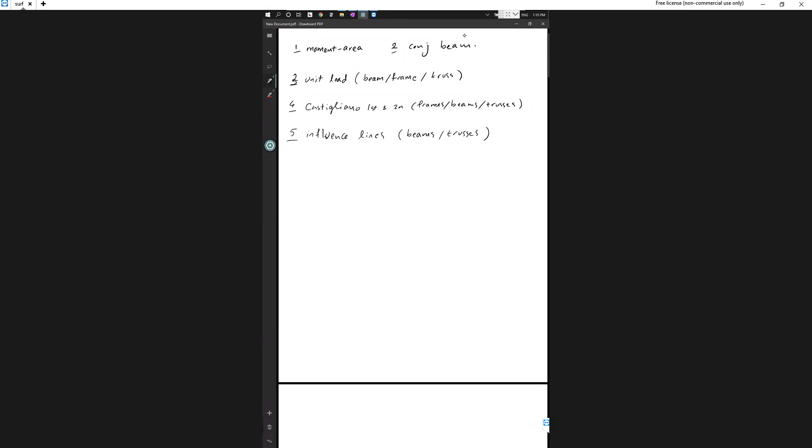So let's begin with influence lines, right? This is probably definitely gonna be there several times, maybe. So let's see, this is I think similar to what was done in class lecture.

Right, so you have a beam like this. As I'm moving forward, if you see something you don't understand, you can either unmute yourself and talk or write it in the chat area. All right, so that's the problem. Let me see.

Yes, okay, so let's call this point 1. Let's call 2, 3. Let's call this 4. And let's call this 5, right? So you have all these points, right? So this is A, B, C, D. So this is your beam. So you can plot the influence line.

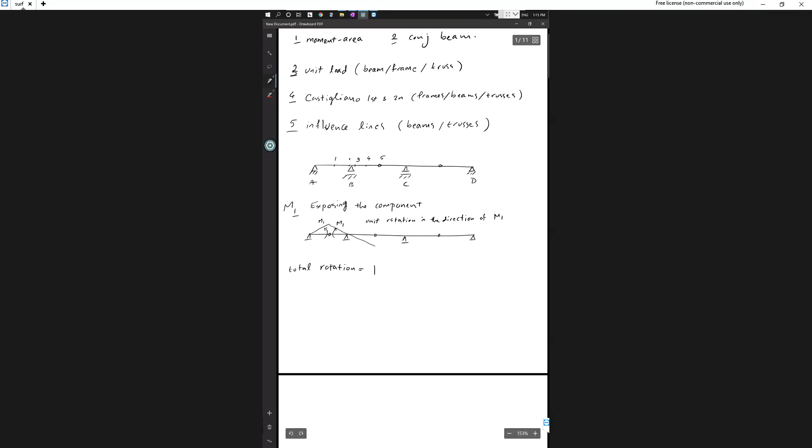So I can move this, bring this up, right? Nothing is preventing me from doing this. So when you come here, for the right side, you can bring this down. I mean, for these problems, you can start plotting and going forward until you run into an issue, right?

So as long as there's nothing wrong while you're moving forward, you can keep going. So there are a few criteria you have to keep in mind. For example, you have to pass through the supports, right? So you can't detach from the supports. The other thing is that this angle should be 1, right? So here is a pin support, right? So you can only break the beam at pin supports, right? So I have to pass through this point, and also you have to pass through this point.

All right, so I have a question: why did I put a hinge between A and B, right? So as I was saying, the first step of our influence line plotting is that we have to expose the component for which we want the influence line, right? So if I want the influence line for moment at 1, I have to somehow bring out the moment at 1, right?

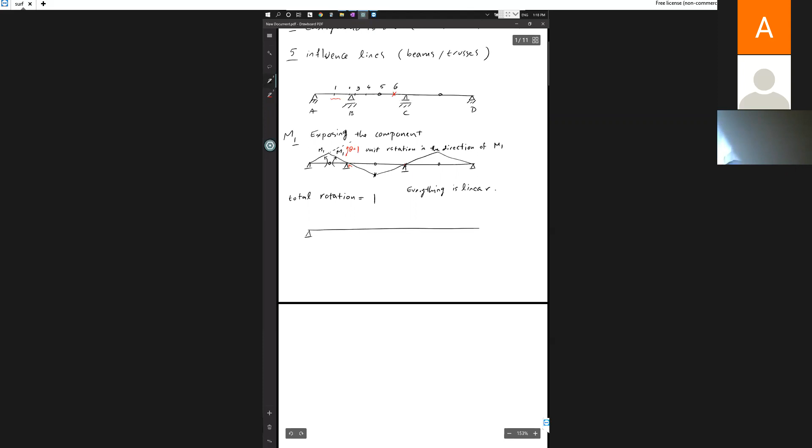Okay, so let's call this point 6, right? So let's draw the influence line for point 6, let's say M6, right? So you put everything as it is. You have this pin here. So what you have to do again - the first step is exposing the moment, right?

So you put a pin. This is basically the same thing as the original beam, but you've just brought the moment out in the open explicitly to be able to rotate the members, right? Okay, so if I want to rotate, what do I do?

So I rotate the right side first. Let's see what happens. So I know that I have to pass through this point, right? So I come down here. And I know that I can break at this pin, and I know that I have to pass through this point. So there is just one way to go, and there is nothing wrong with this, right?

All right, so what about the left side? Let's try something - I'm not even sure what the left side looks like. So I try stuff, let's just keep it straight. So I see that if I want to keep it straight, I have to draw something like this, right? But this is not possible, because this member has to remain straight. Because you have to pass through this point, you have to pass through this point, and there is only one way to do it, by remaining straight.

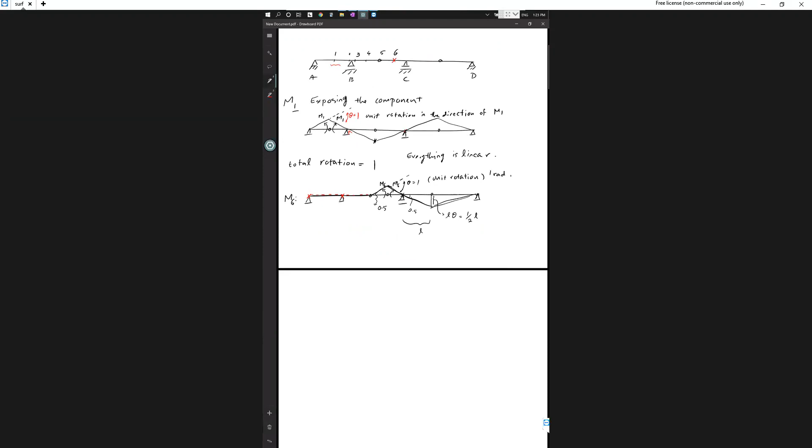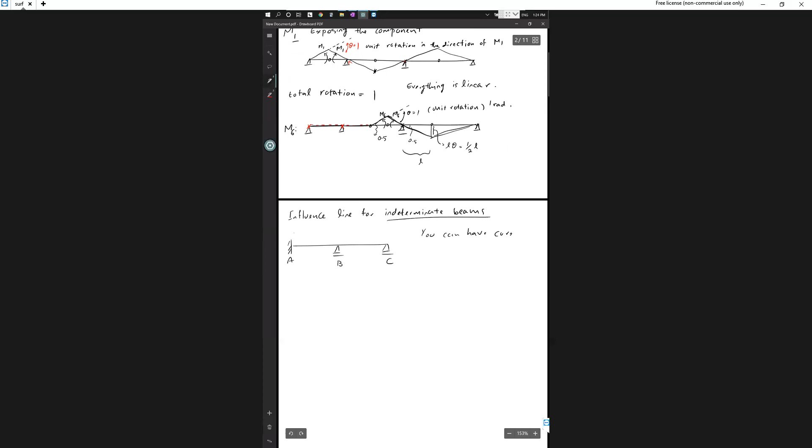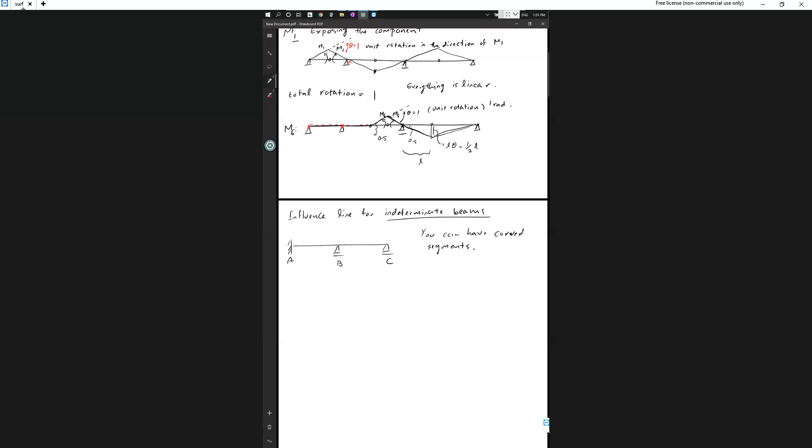Now we go to influence line for indeterminate beams, which is what you're mentioning. So you have the homework problem, which is like this. Let's call this A, B, C. For indeterminate beams, unlike determinate beams where everything had to stay straight, you can have curved segments.

So if I want MA, exposing the force is basically the same again. If I want to expose the moment at A, I can put a pin there. So in your head, you imagine that I'm first zeroing the moment there and then putting its actual value. So there's a moment here, and I have basically exposed the force.

For these indeterminate ones, this is just qualitative. All we can do is plot a qualitative graph. You can't put actual values on there anymore. If you wanted actual values, you'd have to solve an indeterminate problem. But the procedure is the same, except now you can curve the members.

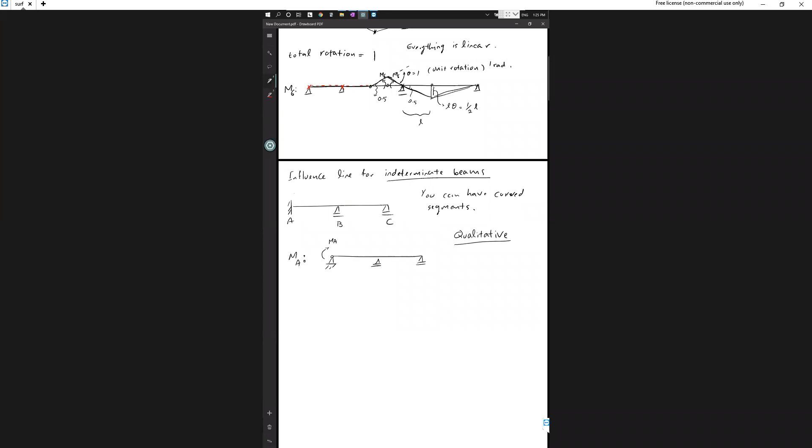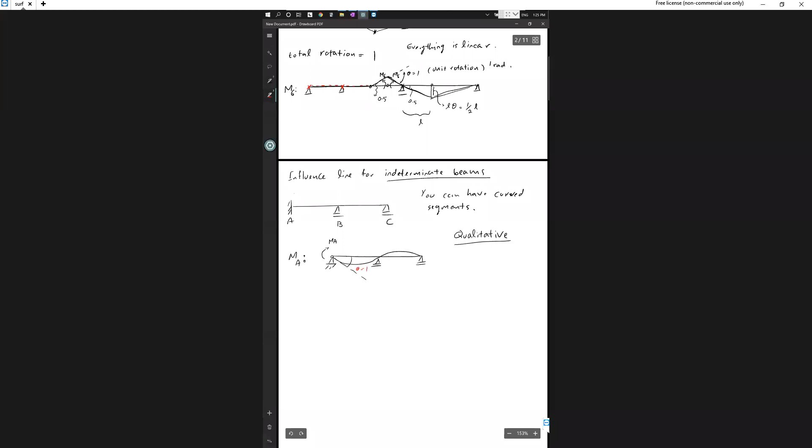If I rotate, again you have to have a unit rotation because it's a moment. So if I do this, you see it gives you a qualitative sense of how things look. This has theta equals 1. So let's do RA.

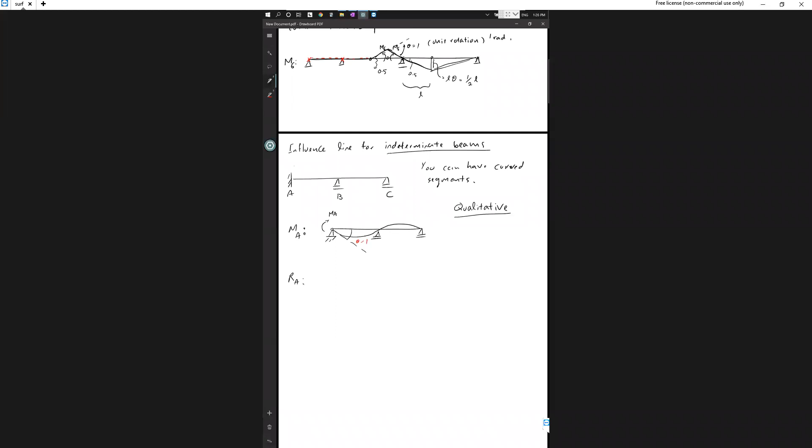After this one, I'll also do an influence line for truss. So let's say RA. Again, expose the force: first zero it, then put the load on it. If I move this up by a unit value, I get something like this.

So let's do one more, just if I put E here. Let's say M at E.

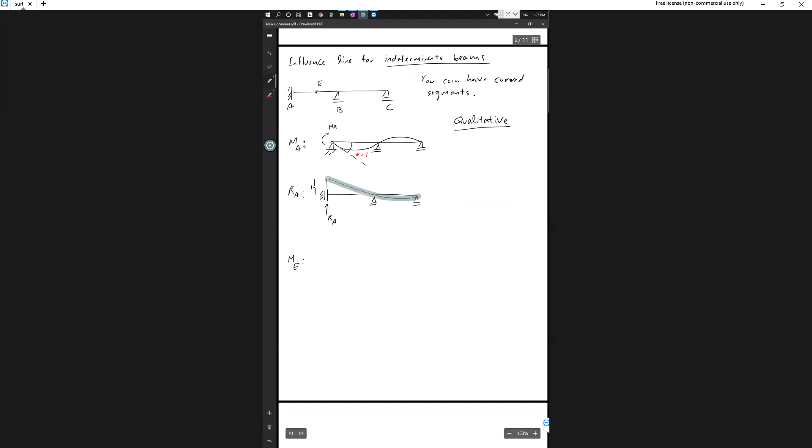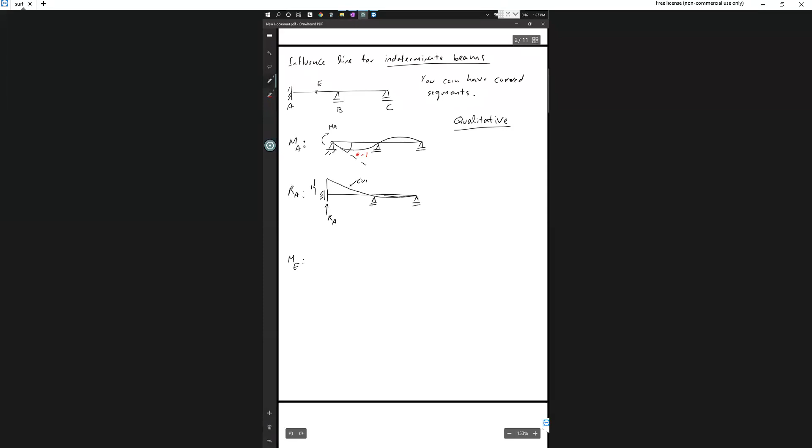For point A to B, is that a straight line for reaction A, or is it curved? It's curved, right? I didn't like, you can imagine it's curved. Yes, this is also a curve. Okay, thank you. Yeah, sure. Nice, thanks for talking, I like that.

So let's do ME and then we move to a truss. Again, exposing the force, it's the same. So you have a point E. If I want to expose it, I just put a pin. I put ME.

So how do we do this? You have to have a unit rotation in the direction of ME. Again, the principles are the same. If I want to move this in this direction, the left side is basically a cantilever, and the right side is again like a curve like this.

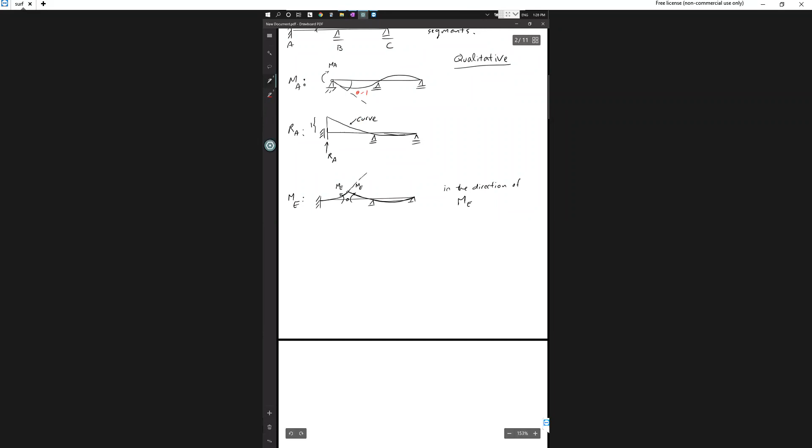Basically, you can imagine that you're putting a moment here and trying to deform the beam using that moment, or you're trying to have a unit difference in rotation. But how you achieve this difference in rotation is by putting a moment there. So this difference is again the unit value.

Any questions on influence line for beams, indeterminate, determinate, and stuff like that? I have a question.

In the homework, there's a unit load going down for the first question, how does that affect this? Oh, that unit load is just to guide you, to remind you of the definition of influence line. So it doesn't affect it in any way? No, the procedure you use to plot it is just like this. Okay, thank you.

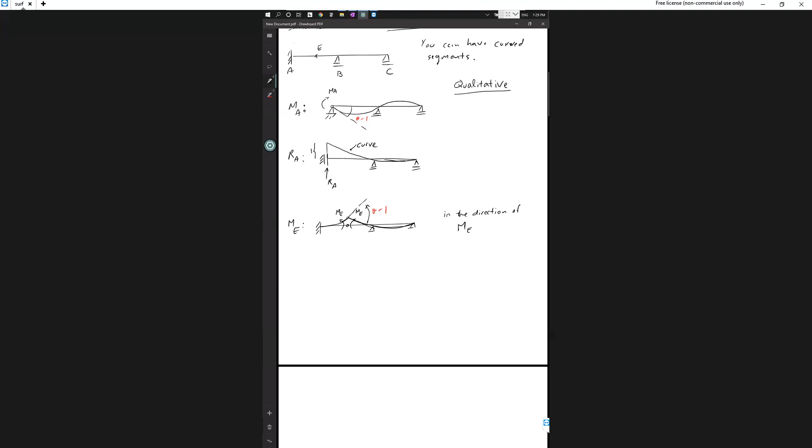Other questions? All right, so let's look at the influence line for truss.

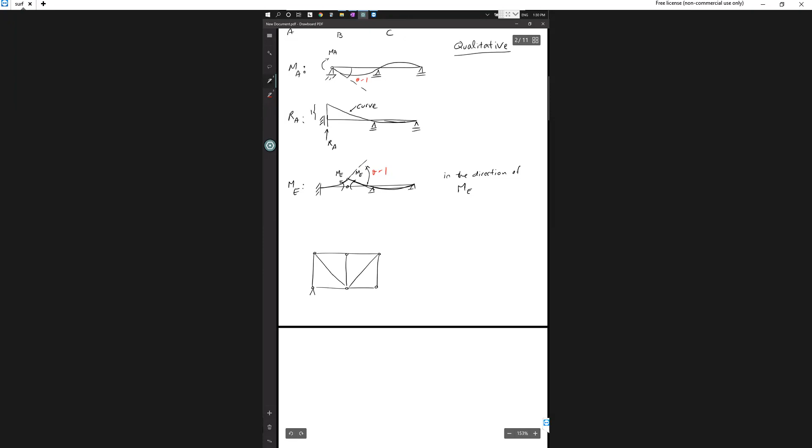I'm just going to use a very simple one. Let's call this A, B, C, D, E, F. For influence line in trusses, the truss one in homework is basically the same principle here, that one is just longer. So if I show how we do this one, it's easy to generalize to that one.

Or I can even do the one in the homework, there's no problem there, let me just bring it up. Where is my... let me find it. All right, no, this is not the one. This is the one. This is the truss from the homework problem. Let me see if I can just quickly do it to save some time.

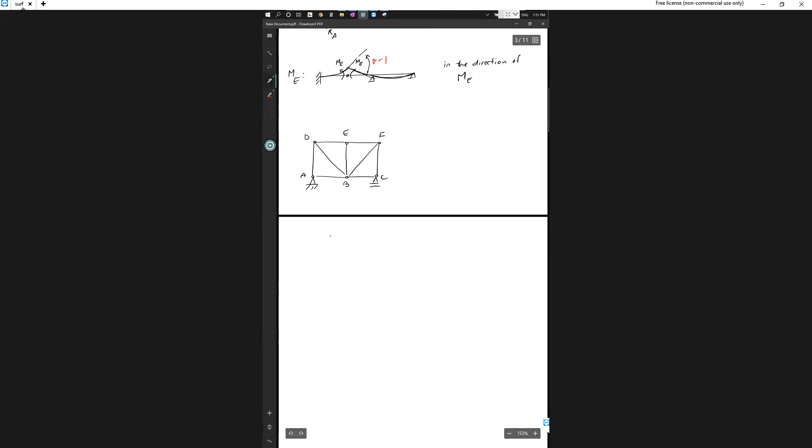Okay, it's not pasting for me. Okay, you know what? I'm gonna do it.

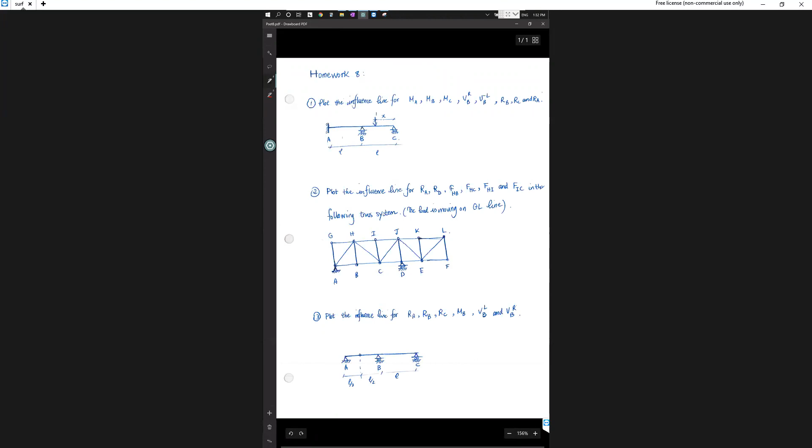All right, so let's say I want the influence line for this one, right? This is the truss. So we have to basically go back, new page.

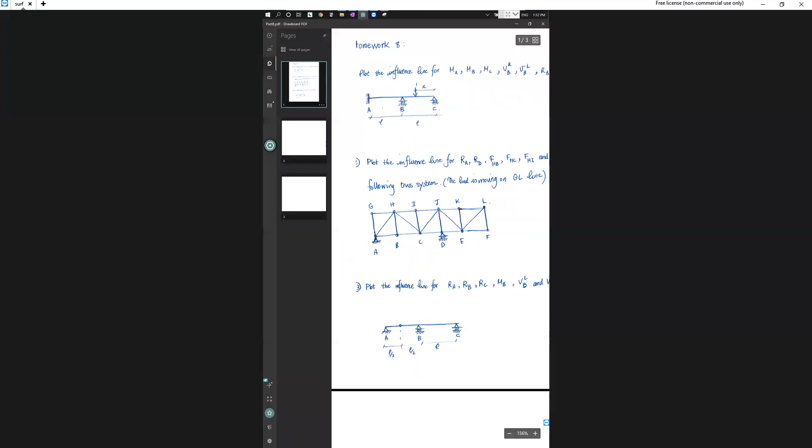So we have to go back to the definition of influence lines. For trusses, this Muller-Breslau thing that we did, like unit load, unit displacement, rotation, right? This is not applicable to trusses. For trusses, you have to just use the definition.

For trusses, the question has to tell you the manner of application of this unit load, right? So the question could be asking for unit load for the moving load along the bottom segment, or maybe it could be asking you for the top segment. Here it's asking for the load moving on GL line, which is this top segment.

So this is not the one. So basically you have a moving load on the top segment, and for these trusses, you apply the load only at the nodes, right? Okay, so let's see.

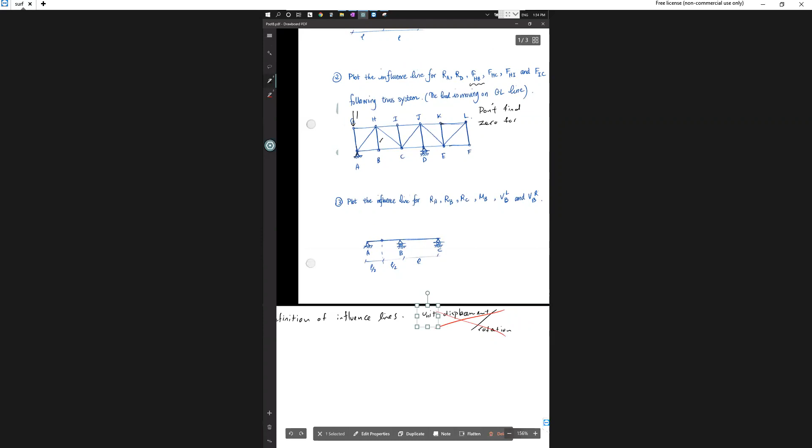Don't do the zero force member before putting the load. This is important. Don't find zero force before putting the load.

So after I've put this unit load here, I can start solving the problem. Like if I want FHB, this is 0, and you're done, because you just want the force in this member. Because you're plotting the influence line for this member, it means that you put the unit load at different places, and each time you find the force in this member. So you don't need to go about solving all the problem. So that's step one, you're done.

So you remove this, you basically reset the problem. You start from the beginning again. Now this time you put the unit load here. You see, this is again zero force member. Then when you want to plot it, you plot this.

So the x-axis is the position of unit load. I saw that when my unit load is here, the value is 0. When my unit load is here, the value is 0. When my unit load is here, the value is what? This is a zero force member again, so it's 0.

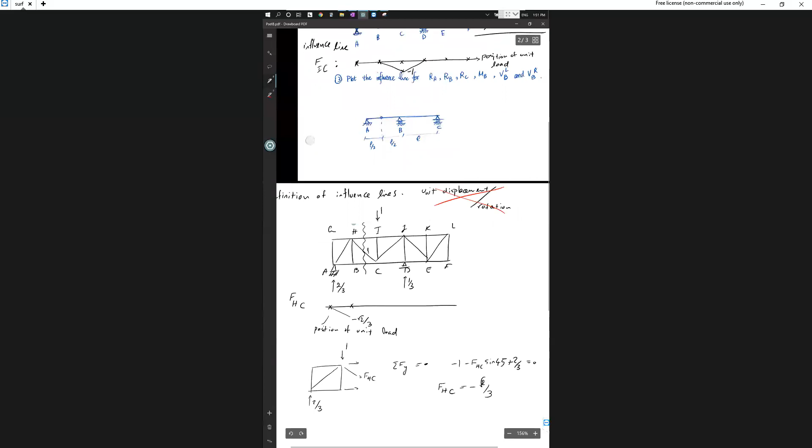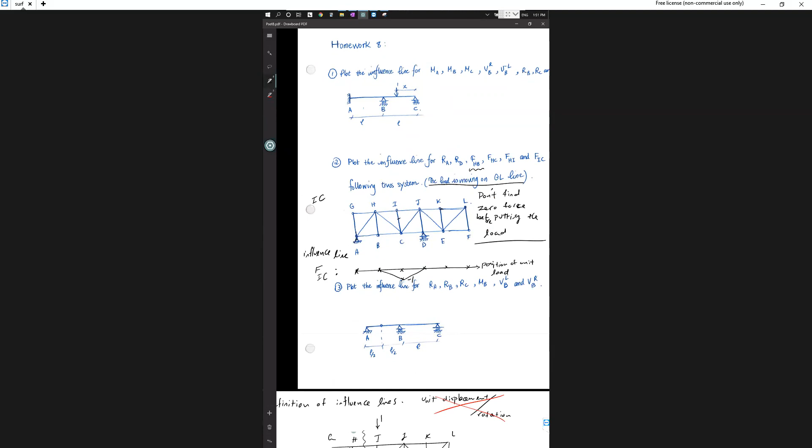Well, all right, any suggestions what we should do now? Problems? I mean, it's online, so I can continue, right? Technically we're at the end of class, but the good thing is no one's gonna throw us out of this class, right? So I'll be continuing until the next people join.

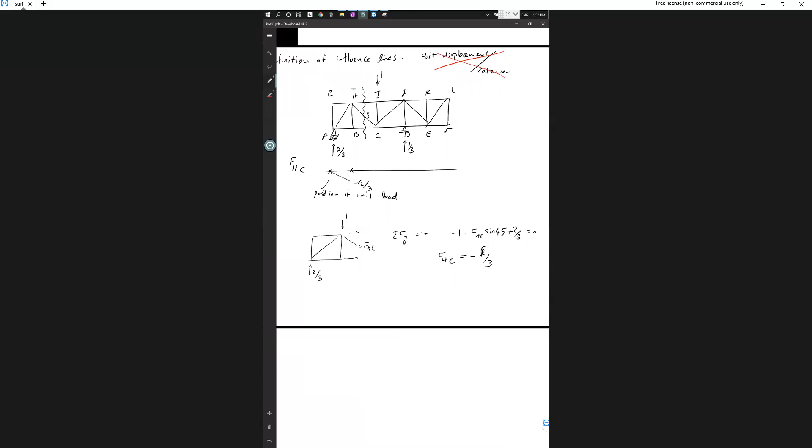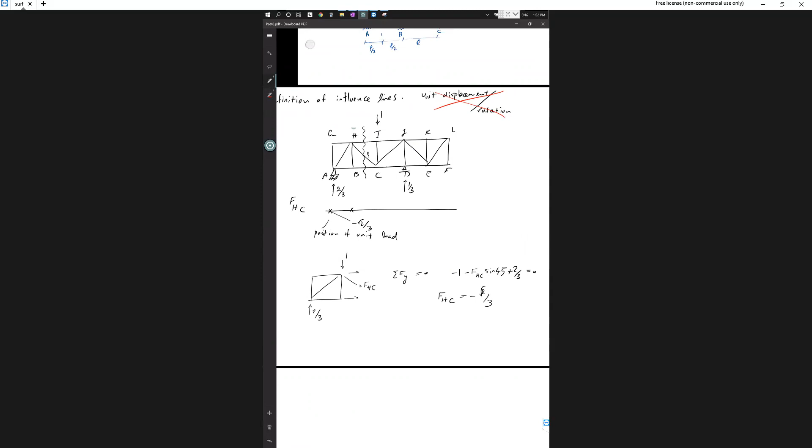So Ron is asking, does the influence line for HC start at point G or H? So you mean like where does this line start? Like this line?

Basically what you do is find the forces at these discrete points. So you have a bunch of points, right? For example, you find that at this point it's here, and then you connect them with straight lines. So you have found that at this point it's 0, so you already have a point here. You have found that at point H, when unit load is at H, it's at this point, right? So you connect them after that. Does that answer your question?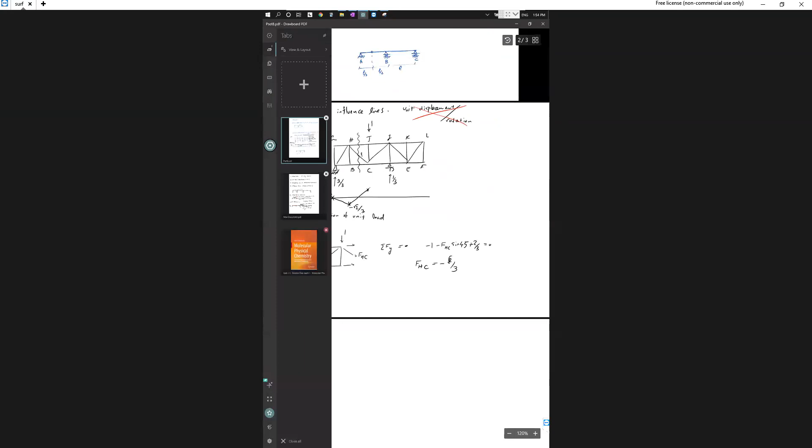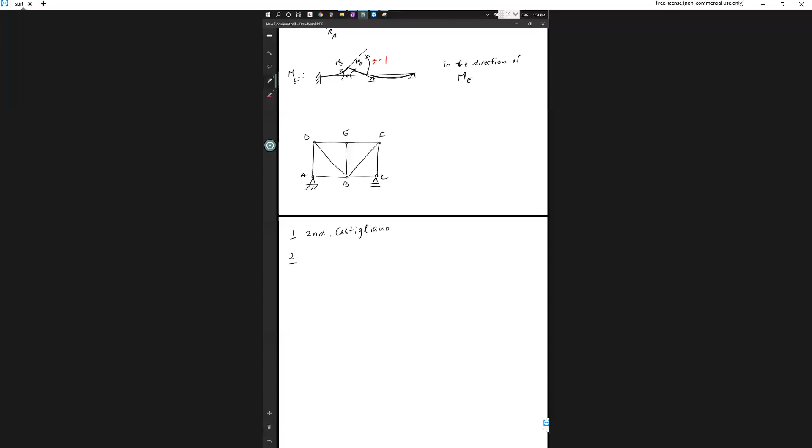Let me see, okay we're back here. Good. So we have 2 requests: second Castigliano and unit load for frames. Unit load and second Castigliano. Let me see which homework was on second Castigliano, I think it was homework 7, right?

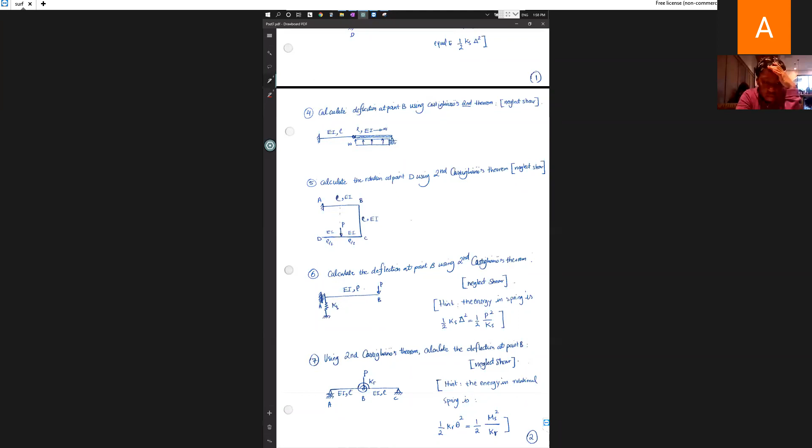All right, I'm back. Let's see. What's a Discord party? All right, let's see what's happening. Choices. Oh, okay. Discord party.

Right, yeah, reacting to messages would be a nice idea.

All right, so let's see what other people have joined for the second class. I'm gonna make this a continuation of the topics we covered in the first part. I've recorded this, so I'll upload the link and you can see the video of the material we went through. I just did some influence lines for the first part. So now we're gonna focus more on deformation stuff, and I'm seeing that people are requesting that, so that's good.

Okay, so let's see what topics we want to cover now. Second Castigliano, I'm gonna do this for a frame first. The unit load for frames. And then for unit load for frame, maybe we can do the midterm, the quiz 3 one. Right, I'll do this one. And first Castigliano, I'm gonna do the quiz 3 one.

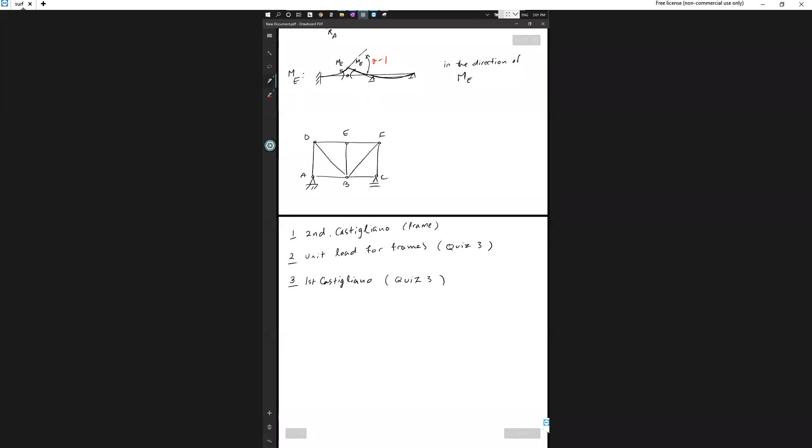So second Castigliano, all right, let's start with the second Castigliano one. Let's find a good problem, like what should we solve? Let's do one of these spring ones. I think I never did this one in class. Yeah, this looks good. Do you guys like this one?

So yeah, I want to do one second Castigliano. I've seen in your exams and quizzes that some people are a bit confused about which method is what. So before jumping into more complicated homeworks, try to use just the simplest examples you can, just to make sure you understand the methods themselves. So always start with very simple, simplest possible examples. Just draw yourself a cantilever and try to solve it with all these methods and check if you get the same answer or not. That's always the best strategy, to start with the simplest stuff.

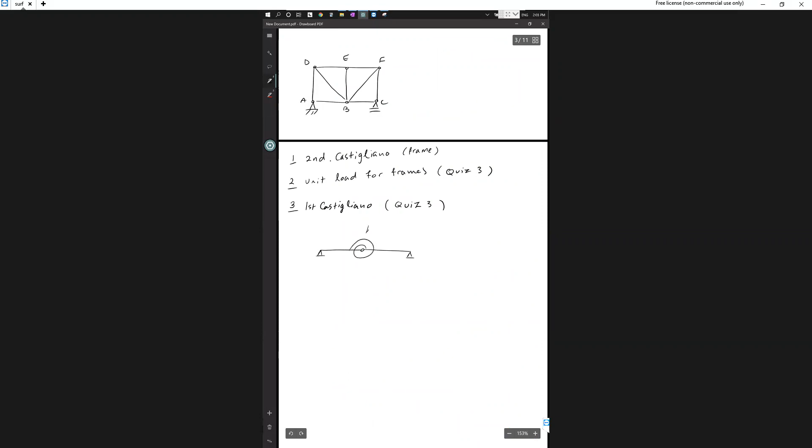So yeah, let's do this one. What do we want? Deflection at B using the second Castigliano's theorem. Okay, let's do this. So we have this thing, right? This is Ks. There's a load P here, right? Here's a load P. All right. So this is L and EI, this is L and EI, right? Okay, let's do it. So we want to use second Castigliano. Just for yourself, write this thing down. So see, this is the first.

So this is first, this is second. The first one says that u should be a function of delta 1, delta 2, or even delta n, or rotation 1, rotation 2. This second one is a function of externally applied forces, so it's about writing the energy as a function of forces.

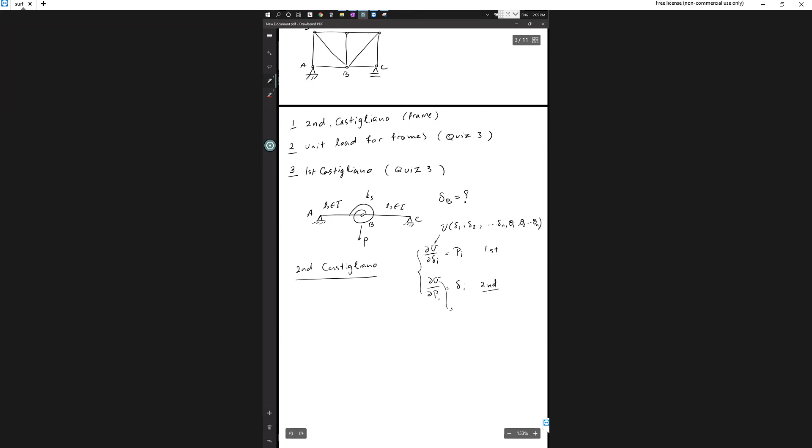Someone's asking what are we solving for. So A, B, and C, we want delta B, using second Castigliano. The second one is a function of externally applied loads, right?

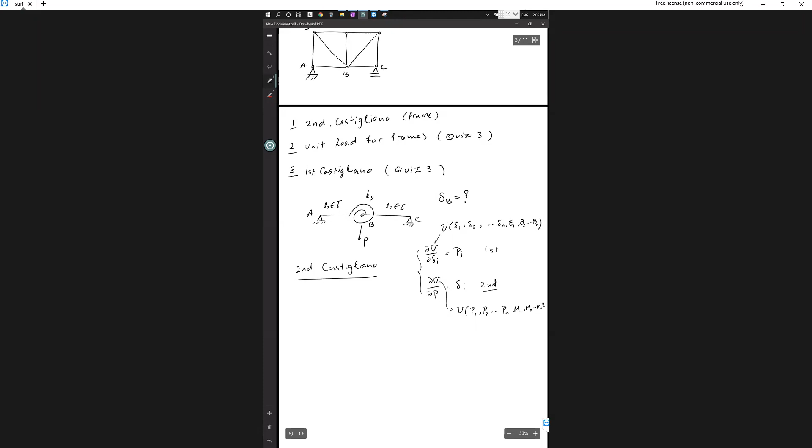Like you can have M1, M2, and Mn. Distinguish the first one from the second one clearly, and make sure you understand these two methods are different. When you solve something using the first one, you use formulas like EA delta squared over L, 2L. This was for a bar, remember? For the beam segments or frame segments, you had that big formula. These are functions of deltas.

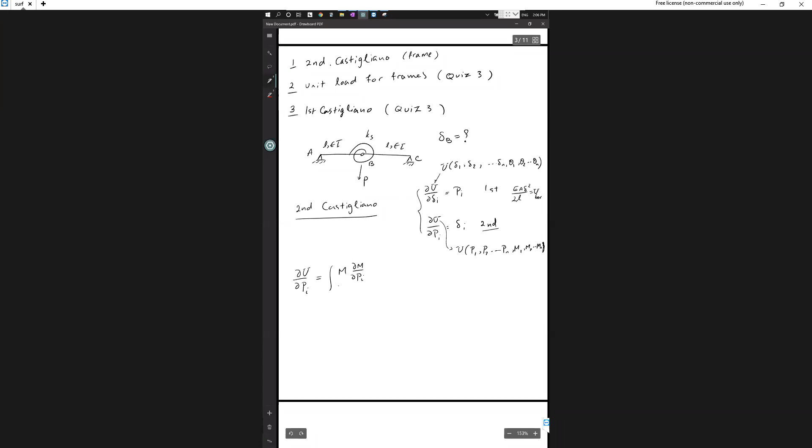But for the second one, how you calculate energy is different. You say, okay, I want this partial thing. This partial thing would be the integral of m, partial m over EI. This is when you want to include just contributions from moment. If you want contributions from axial force, you have to include that as well.

Remember that this is after the equation, after differentiation. So u itself is just the regular m squared over 2EI plus n squared over 2EA.

All right, let's see. Again, I'm stressing that this is the second Castigliano. The second one is about forces, and basically you just have to find the moments and axial forces in the segments, and write energy as a function of forces. So I just have to find the moments. This one is a very simple one.

So if I do this, there's a P here, so this will be P over 2, this will be P over 2. If I take my x from here, and this is symmetric, I just need one side. So m of x is Px over 2.

What was the first one? The first one was unit load method, right? Unit load method.

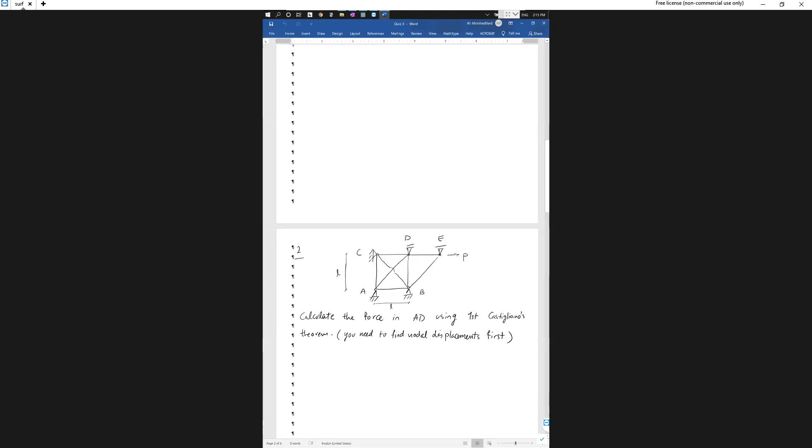I'm gonna start with... what do you guys think? I think I never solved this quiz problem in the homework. Do you want to solve all of them? I can start from the beginning, like a review of the unit load method, a review of the first Castigliano's theorem, and a review of the unit load method for frames, right? Yeah, so I'll start with the first one.

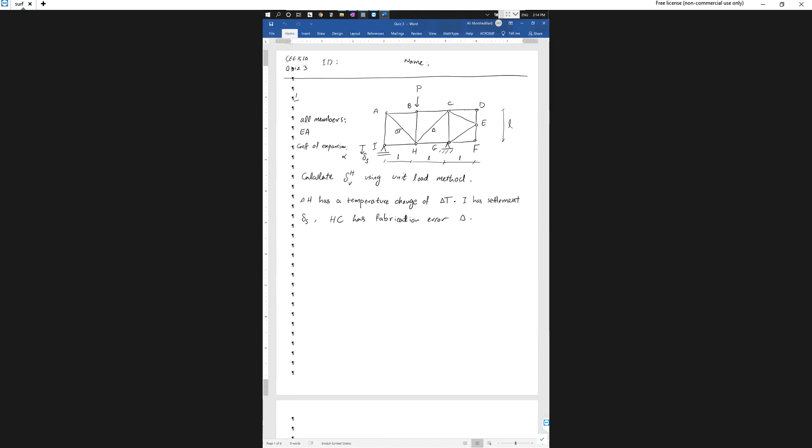I wish I could copy this, but I can't. Gonna try. Oh, you know what? I'm gonna open it here. Oh, nice. Okay. All right, let's solve this.

So we want to use the unit load method, right? We want to find delta vertical at H, right? So the procedure for the unit load method is that first you have to solve the actual structure.

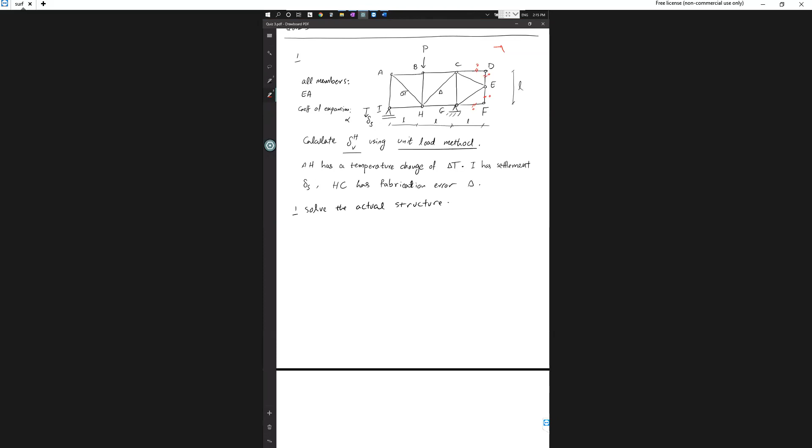So it's just a regular truss analysis, right? So you find the zero force members. These two are zero because of the form - you have a kink, like a corner with no load. So again, this one is the same. After you find these two, imagine you're removing them. If you remove them, these two also become zero. So that was easy.

What else? Is there any other zero force members? Oh, I see one more. We had this situation before, right? This is also a zero force member, when there is no load here. This is kind of equivalent to when you have a support like this, in the direction of this member, then this third one is zero. Basically they are the same, right?

So what this does is basically give you one component of force in the direction of this member. So basically it's the same as this one. Since this gives you a force in that direction, this support gives you something like this, so this one is zero. I don't see any other zero force members. Anyone see any other ones? I think that's it.

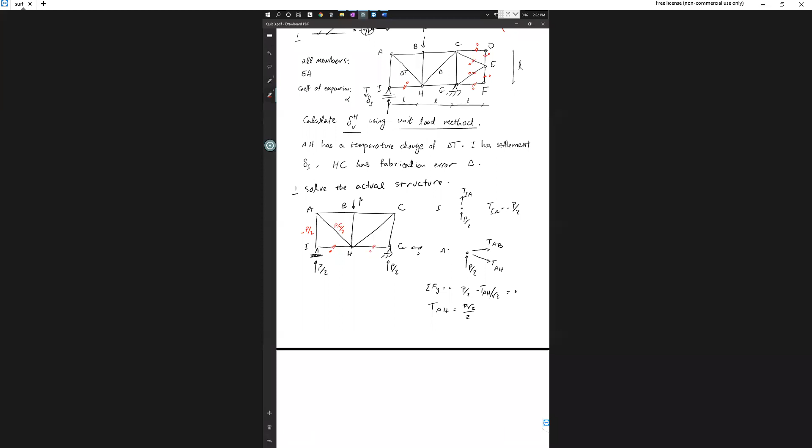So sigma Fx for A is 0. So TAH over square root of 2 plus... okay, so I know TAH is like, so I know P over 2 plus TAB should be 0. So TAB is again like negative P over 2. That makes sense, right? So these two compressive forces, you can just do a quick check. So these two compressive forces, and you have one tensile force. So the node A is at equilibrium.

So all that remains is this node, node B. So if I do node B, so I have 1P going down, you have some P over 2 here, symmetry, P over 2. So this is basically P. So this will be negative P. And the right side, the rest of them, because of symmetry, is going to be the same.

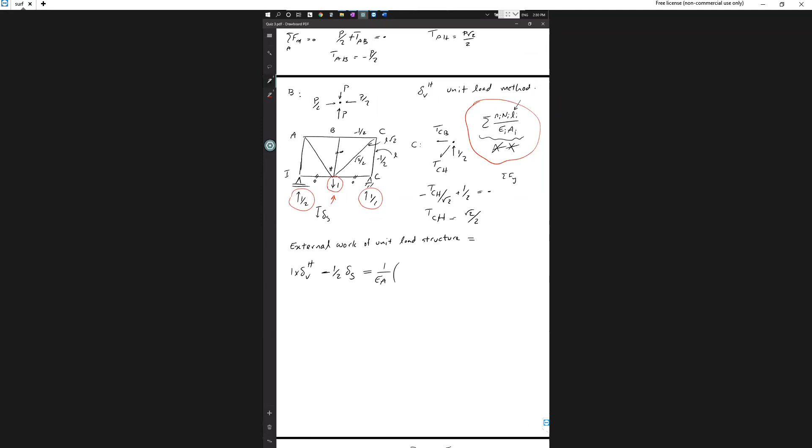So we just have to multiply now each of these terms for each member. You just have to go member by member, and remember that if you have a member that is a zero force in either of them, you have these terms, capital N and lowercase n, right? So if this is zero or this is zero, you don't need to write it.

So let's see, for example here. So you see these four members are non-zero in both of them. In both of them, and they have the same values in four members, right?

So you can chop it into two categories. So let's see, you have 4 of negative p over 2, negative half, length L. Okay, let me write it like this.

Everyone understand what I did here?

Sam is asking, let's say the reaction force was pointing down, like this. You are correct, if the reaction was in the direction of the settlement, then your work would be positive. Remember the expression for work: cosine theta is the angle between the force and the displacement. When it's 180, they are in opposite directions. If they're in the same direction, theta is 0, then you have a positive sign. Does that answer your question, Sam?

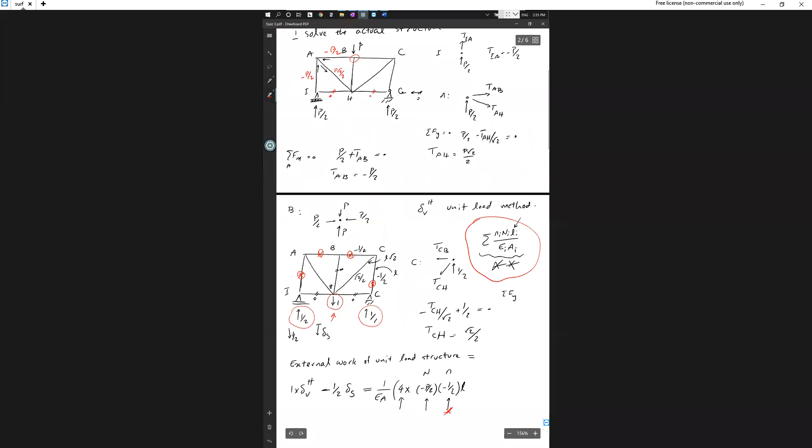So I have 4 members, right? So these 4 members also, they have a value of negative p over 2. So I put it here. So I see that the value of n times n is the same for all these 4 members, so I multiply it by 4, right?

So the same goes for the other members, so you have square root of 2 over 2. So now I'm looking at this member, these two. You have again the same force for both of them, so you have square root of 2 over 2, and the force in the other one is p square root of 2 over 2.

So that takes care of the effect of internal forces on deformation. So all that remains is temperature and fabrication error. So we say plus, the temperature effect is L alpha delta T times N, right? So again, you have to sum it over all members.

So here, only one member has temperature change. You see this AH,

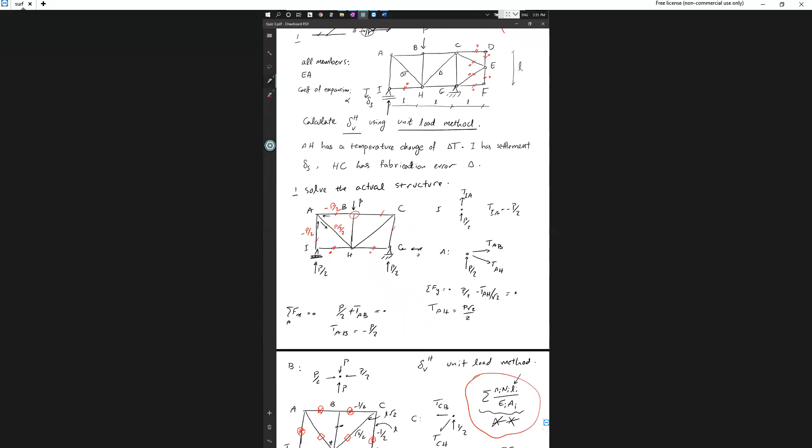Are you talking about length? Oh okay, okay, so yeah, I forgot the length here. Thanks. So this should be L square root of 2. Nice, yeah, thanks for mentioning that.

So yes, I have just one member, right? So it becomes L square root of 2 alpha delta T. The force in this one, so this one has delta T, this member. So the force in this one is square root of 2 over 2. And that's it, that's all you need to do for temperature.

So if I move this down and move this up, plus fabrication error. So which member has fabrication error? This member has fabrication error. So fabrication error is easy, like if it's like this, delta times square root of 2 over 2, that's it, so basically delta times

That's basically everything about this unit load method for trusses. Any questions on this? Let me see this.

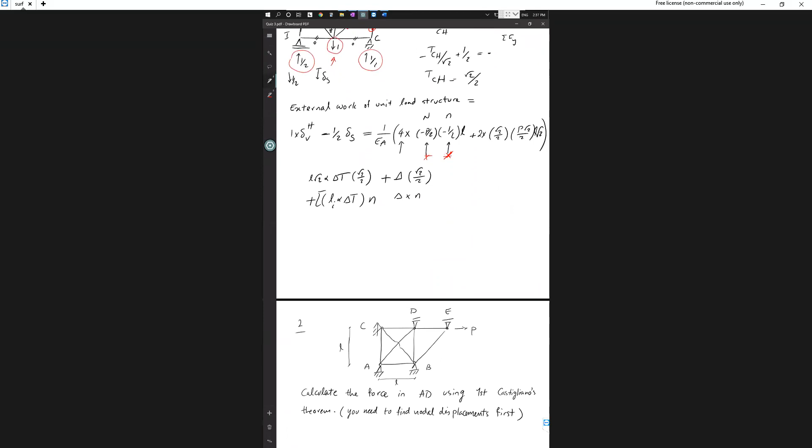Questions on the unit load method? All right, if not, let's move to this one.

Definitely you're gonna have some question like this on your quiz, on your final. So try to understand everything about this unit load method.

So we solved the second Castigliano theorem. Now this is the first Castigliano theorem for truss. All you need is the energy term for a bar, which is EA delta squared over 2L. This is the elongation or shortening in a member.

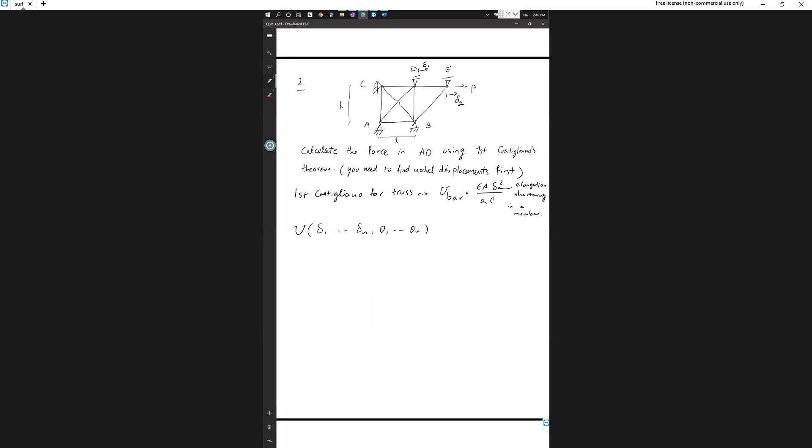You have to label the total displacements of the structure, the total degrees of freedom that you have. I have seen in the exam some people assign displacements to fixed nodes. The pin supports do not move, so basically you're finding the degrees of freedom, where the structure is free to move. In this structure you just have delta 1 and delta 2. This is the first step for first Castigliano. Remember, the first Castigliano's theorem is about displacements, so you have to label the nodal displacements, the nodal degrees of freedom.

So I'm gonna name the members: 1, 2, 3, 4, 5, 6, 7, 8. After you have labeled the members and the displacement degrees of freedom, you have to find out the elongation and shortening of each member.

So I start from member 1. You see member 1 is something like this. There is no shortening or elongation of the member because both of its ends are fixed, so there's nothing here.

Member 2 is basically similar. How about member 3? You see member 3 has this delta 1 here.

You can bring these members out one by one. If you find the components along the member, this will be delta 1 times cosine 45. We want the elongation of the member, so it's important in what direction this degree of freedom is moving the member. If a member's delta is perpendicular to the member, perpendicular components don't contribute to elongation. So this becomes delta 1 over square root of 2 -- that's the elongation of member 3.

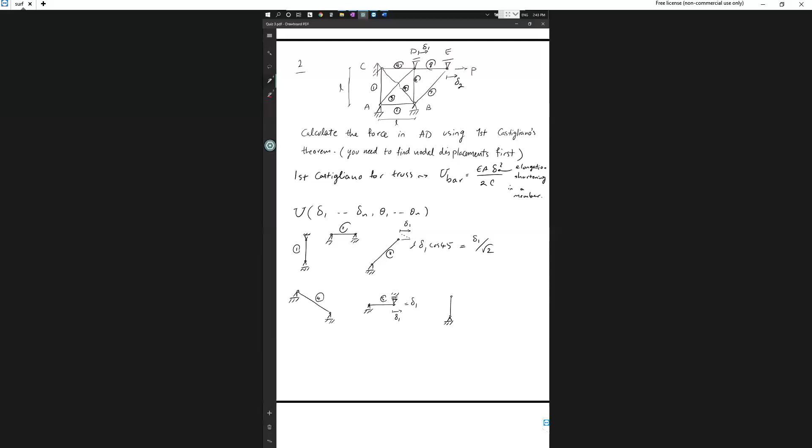How about member 6? Okay, member 6 is also interesting. There's a delta 1 here, but it's perpendicular. So the elongation or shortening is 0 -- the component of delta 1 along member 6 is 0, meaning delta 1 does not have any component along that member.

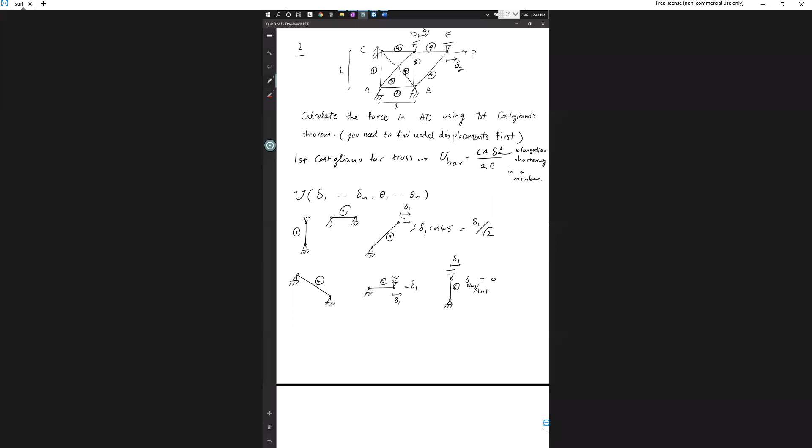So let's see member 7.

So you have delta 2. This is member 7, right? You have delta 2 again. The component shortening is equal to delta 2 cosine 45, which is delta 2 over square root of 2.

All that remains is member 8. Member 8 is also interesting, right? So member 8, delta 2, delta 1. So the elongation or shortening is delta 1 minus delta 2. You see both ends are moving, so you have the difference in lengths of the member itself. It's like the difference of these movements at the ends.

Now that you have the elongation for all members, you can start writing the energy, based on this formula. So U for member 1 is 0. For member 3, basically, EA over 2, I bring this out. Remember that lengths are different for each member. So I have delta 1 over square root of 2, squared.

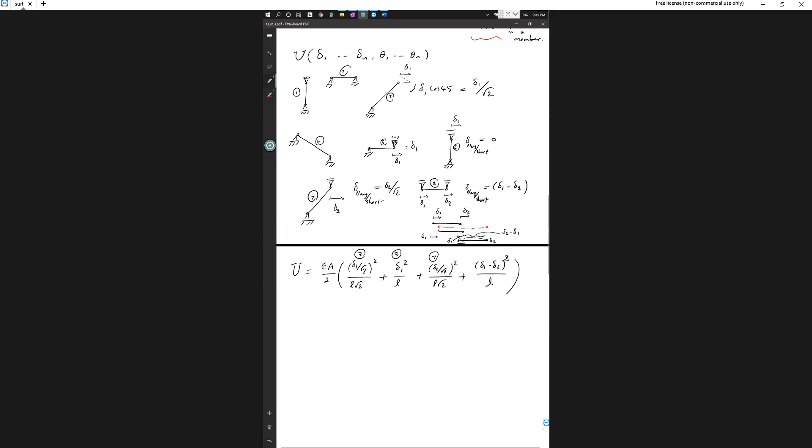Okay, nice. All right guys, I think we are done here with this. So for member 8, all you need to do is take partial U partial delta 1.

Let's first simplify it a little bit before. Let's see how we can simplify this. U is EA over 2, delta 1 squared over 2 square root of 2, plus delta 1 squared, plus delta 2 squared over 2 square root of 2, plus delta 1 squared minus 2 delta 1 delta 2 plus delta 2 squared. So basically this one, this one, this one, this one, this one.

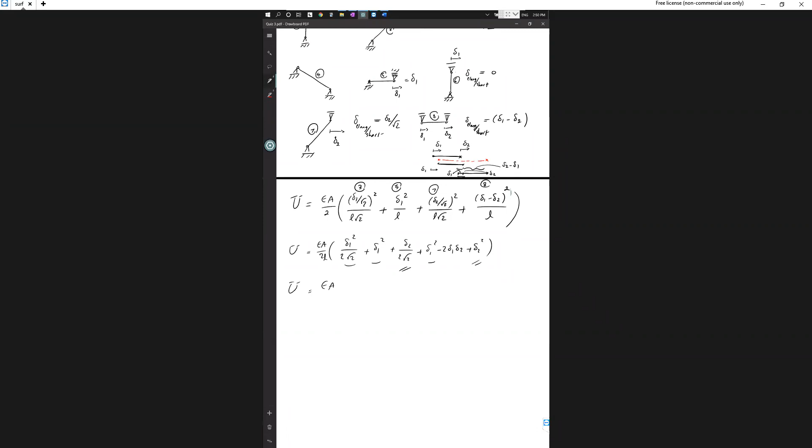So U is EA. Let's multiply everything by 4 square root of 2 L. Delta 1 squared plus 2 square root of 2, delta 1 squared plus delta 2 squared plus 2 square root of 2. This becomes 4, plus 2 square root of 2, delta 2 squared plus minus 2 delta 1 delta 2. So U is EA over 4 square root of 2 L,

times 1 plus 4 square root of 2 delta 1 squared, plus 1 plus 2 square root of 2 delta 2 squared, minus 2 delta 1 delta 2. Yeah, this problem numerically is kind of ugly, but that's the way it is.

Why is the displacement for member 6 zero? All right, so for member 6, if you plot it like this, imagine delta 1 is a vector. We want the component of delta 1 along the member. Do you see that this is perpendicular, right? So it has no component along the member. Does that make sense?

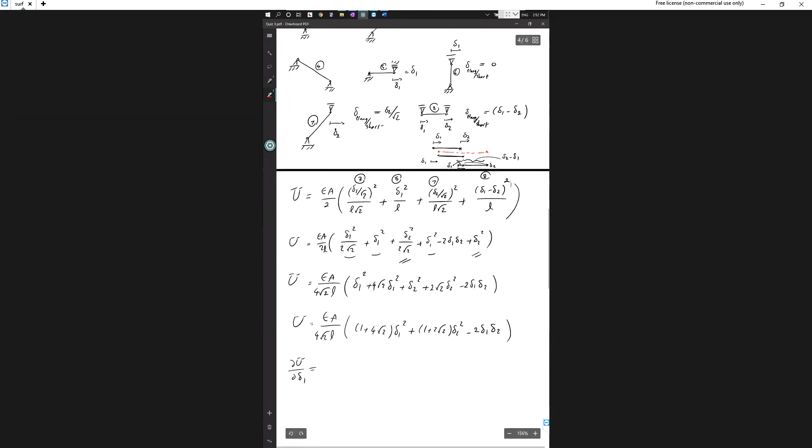Now partial U partial delta 2 is equal to P. So you see the same. If you look at this node, it becomes P.

That's it. You just have to carry out this ugly two equations, two unknowns. So EA over 4 square root of 2L times delta 1, 2 times 1 plus 4 square root of 2 delta 1 minus 2 delta 2, this should be equal to 0. Then EA over 4 square root of 2L times 2, 1 plus 2 square root of 2 delta 2 minus 2 delta 1 equal to P.

Now you just have to solve this two equations, two unknowns. You can find, for example, delta 2 from here and then substitute in this one. And then find delta 1 and then substitute back in one of them and find the other one. So let's assume that I have found delta 1 and delta 2.

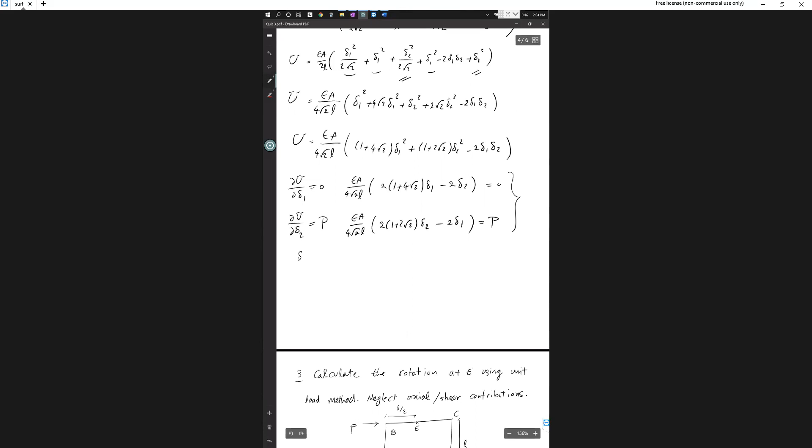So you see the problem wants the force, right? So the problem wants the force in AD, this member, right? So AD was like this, so it had delta 1. So to find the force, you need this formula, right? So the force is EA delta over L. Now this delta is like elongation, right? Or shortening.

Now, if you find delta 1, then the elongation is what? So you find that FAD is equal to EA delta 1, delta 1 over square root of 2 over L square root of 2.

So that's basically this first Castigliano's theorem. Any questions on that? Ali, yes.

If they asked for the force for like a diagonal member, which included delta 1 and delta 2, for example member 8, how would that affect the force?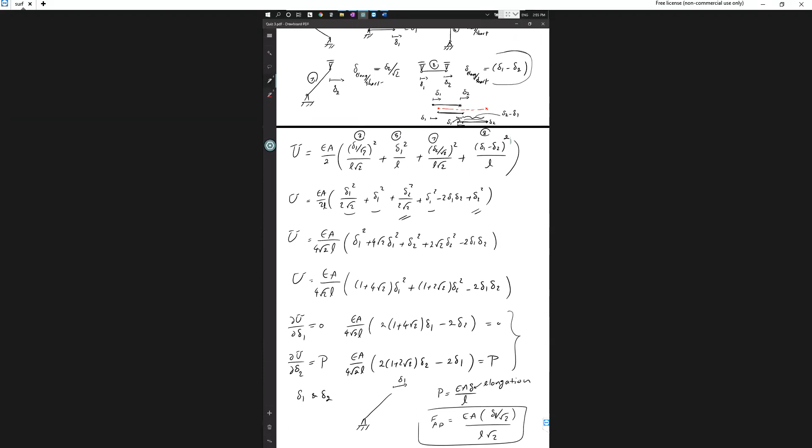Oh yes, so you see, you have to substitute this subtraction, right? So you have to calculate the elongation of the member like we did here, and then you substitute, for example, for let's say, which member was that? Like member 8, right? So f member 8 is equal to EA based on, okay, so here you can know the sign after you calculate delta 1 and delta 2, you know the actual signs of these two, right? So let's say you find out delta 2 is greater than delta 1, and then you divide by L. So this becomes, so now these are known values for you, right? You don't need to assume anything. These are known values. Does that answer your question?

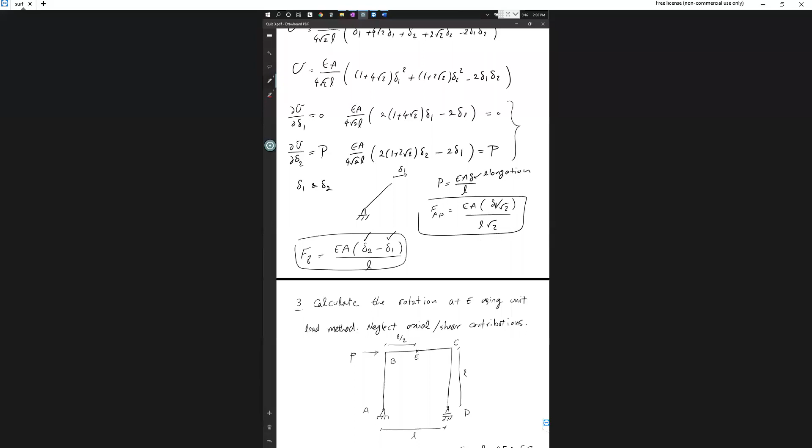So just say that delta 2 is smaller than delta 1, then you get a negative value for the total delta. Does that mean that the force in 8 is a compressive force?

Yes, exactly. So you see, for example, if I have this member, this is delta 1, right? And this is delta 2. So let's say delta 2 is 0. So this is in compression, right? So delta 2 minus delta 1 is going to be negative here. So this gives you compression. Does that make sense? Yes, thank you. Yeah, sure.

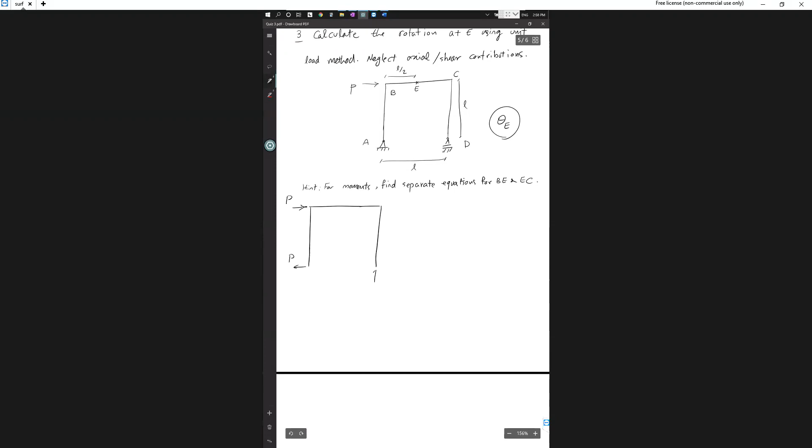All right, so you find the reactions first, right? So this is gonna be P here, this is gonna be P here, and this is gonna be P. So these are the reactions, right? So you can be smart about where you take coordinates for these frames when you want to calculate the moments. So we have to get the actual moments, right? So this is A, this is B, this is C, this is D.

So you use the cut method, right? The cut method is probably the best. You bring this out. So if I bring out the cut, there's going to be P, there's going to be P, and this is X. And I want this moment, right? So MAB. So MAB is PX. And your coordinate is like this. This is X, this is Y, right?

Okay, so because there's E, I know that in the unit load structure there's going to be a discontinuity here, so you have to do some extra stuff at E.

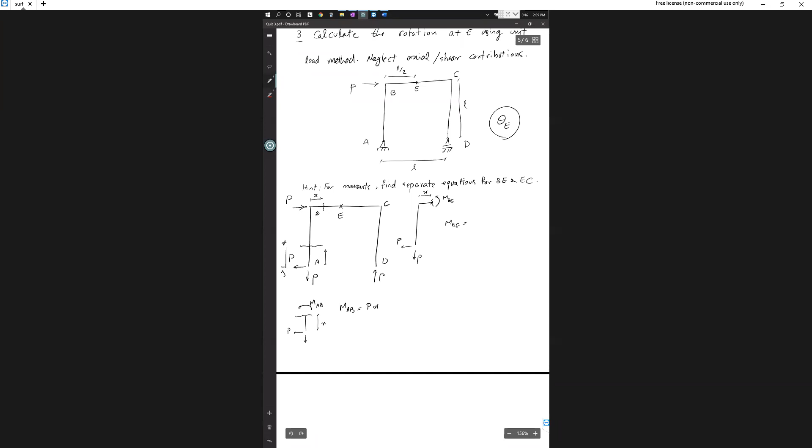So for E, I take my coordinate like this. You make a cut here. So if you bring that out, this is your cut, this is X, this is P, this is P. So you just take the moment about this point, so this is MBE. MBE is equal to PL minus PX.

Now your coordinate is like this. For the right of E, I can take my X from here. Make a cut here, so this is going to be M, I call it MCE. There is one P here. MCE is going to be PX.

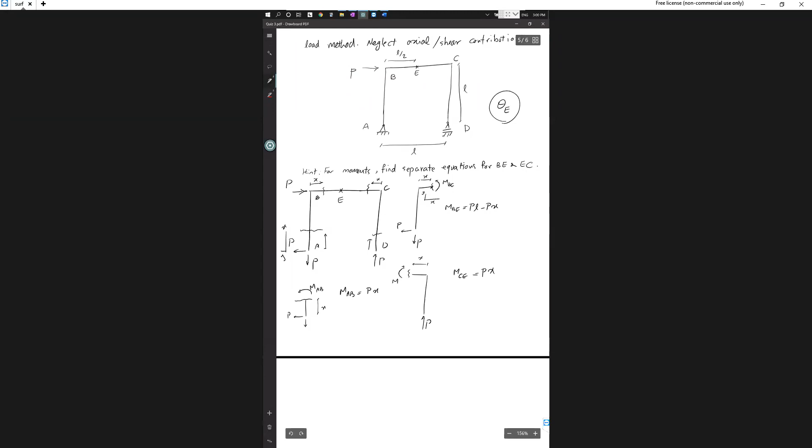So that was my analysis for the original structure. That's it, so you have the moment everywhere. Oh, there's one member remaining, which is DC, so you need one cut also here. So if I make a cut, it's going to be like this. This is P, so MDC is 0, which is good.

So now the unit load structure is something that many people got wrong, unfortunately. So you want the rotation at E. I've seen people apply forces. So you want the rotation, right? So when you want the rotation, you apply a unit rotation, a unit moment.

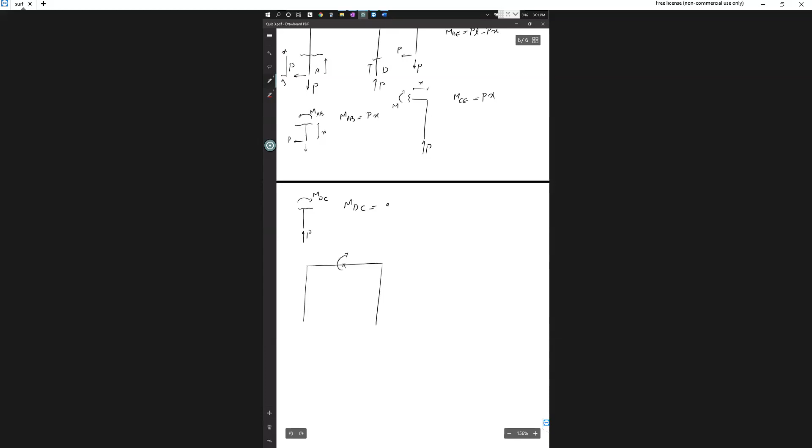So this is one. So again, you have to repeat the analysis for this structure. If you take the moment about this point, you get 1 over L for this one. So we get 1 over L, and sigma of x is 0, so this is 0.

Okay, so you see A, B, C, D. So again, if you have to use the same coordinates that you used before, that's very important. In the unit load structure, use the same coordinates as used in the original—by coordinates I mean you make the same cuts as in the original structure. So here I make a cut again like here, then you find that MAB is 0.

MDC is 0. How about this cut? So again you make a cut like this. So this is 1 over L. Now you have this tiny MBE, and this is X.

Oh, so Brian is asking about the unit of 1 over L. Okay, so the thing is, this one has a unit—this one has a unit of force. So basically it's force over displacement, it's force over length, sorry, it's moment over length. So you see, this one has a unit of moment, which is, let's say, Newton meter. So here you have Newton meter over meter, which is Newton, which is force.

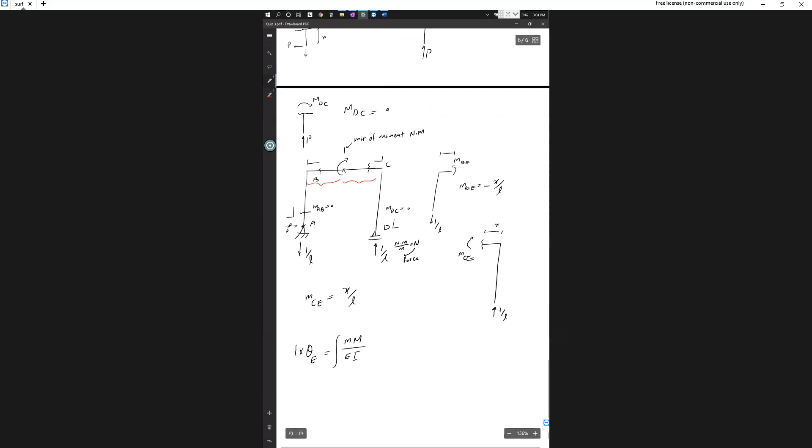So the moment diagram looks like this for the unit load structure. So this is plus half, this is negative half, negative plus. So this becomes 0 to L over 2, this is for BE.

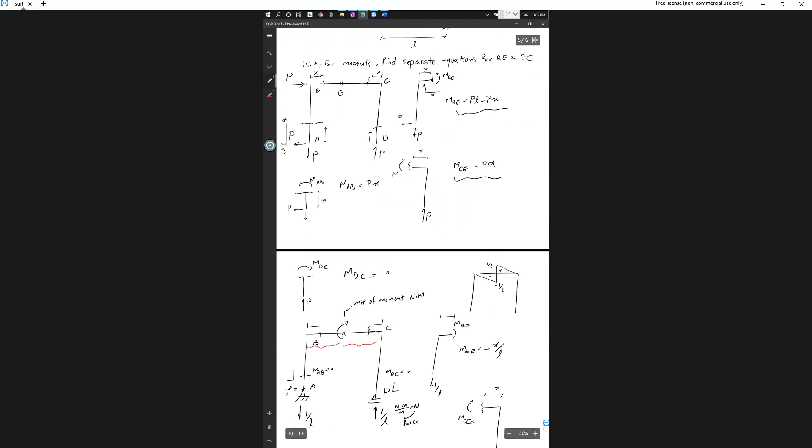Becomes—so you put the capital M, so for BE it was PL minus PX, times negative X over L over EI, plus integral 0 to L over 2. So for CE it's PX. Remember that I used the same cuts, the same X's, in both the unit load structure and the original structure, so this will be X over L. And that's it.

After you calculate these integrals, you have theta E. I think that was a good problem.